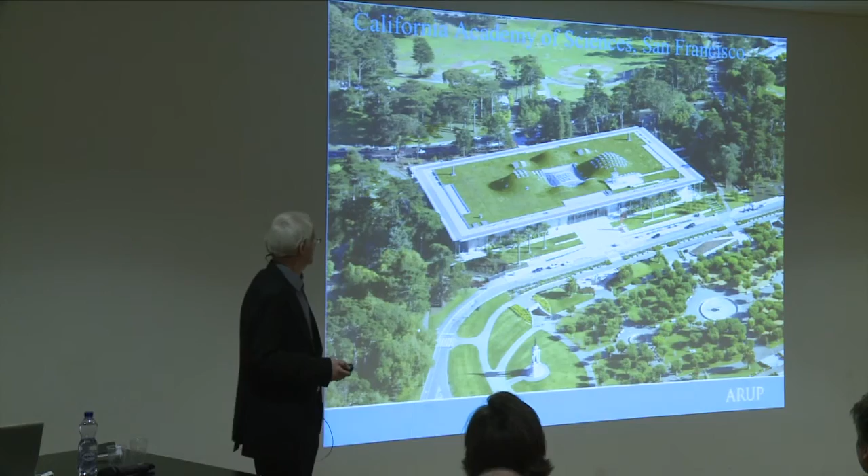So let's come on and talk about this project. It's the California Academy of Sciences.

Another thing that as ARUP we do is invest in research and development, because unless we put investment into innovation, and we innovate continuously through research projects but also through our own projects, you do it on the job and off the job together. Then we will not be able to bring new solutions, new ideas, new directions to our projects. Very appropriate today with COP21 started, the climate change is a huge challenge which demands that sort of level of innovation and integration if we are to solve it.

So ARUP is the creative force, as we heard, behind many of the world's most prominent projects. I hate to use the word iconic, but we do. And I want to talk to you about one or two of those this evening. But first of all, I just want to put this quote up, which is a kind of preface to everything that I want to say.

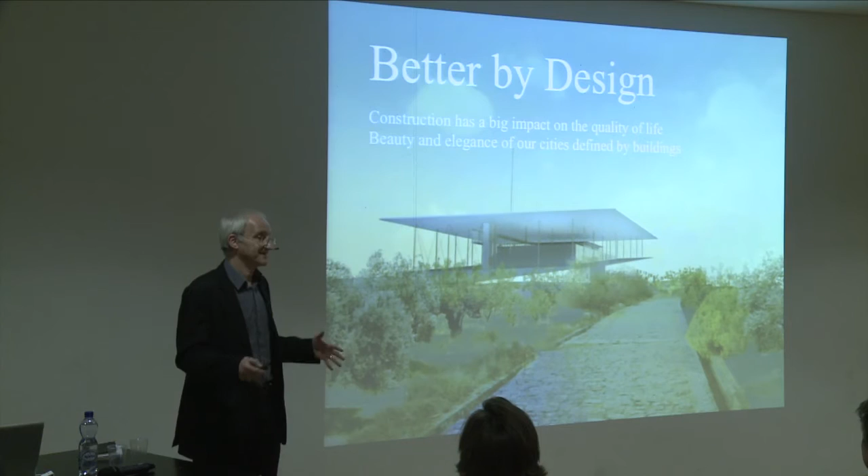And people say to me, well, I just like green fields, I don't want to touch anything. So let's imagine that a sustainable future involves construction. It's good for us in different ways, it's good for us because it can have a big impact on the quality of our life. The beauty, the elegance of our cities that we walk through are largely framed and function by the buildings which sit within them and the spaces that they create between them.

And our buildings, our construction is able to improve the society in which we live through hospitals, health, education, by creating better social fabrics, by creating cities which are nice to dwell in. So construction can and does enhance society.

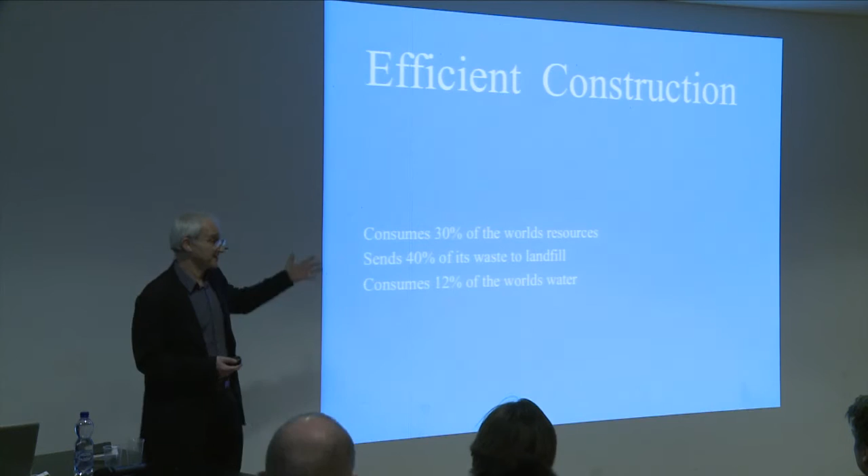But of course it needs to be efficient because it consumes around 30% of the world's resources. It sends, I think this is an old figure, 40% of its waste to landfill and consumes 12% of the world's water. So what we build, as we build it, has a huge impact on the world in which we live, okay?

Of course, our cities and the energy that they consume has a huge effect on greenhouse gas. And that's why at COP21 they are finally having some sessions on the effects of buildings, which is really important.

So this is where I think we want to go. What I think is that we need to think about what is our responsibility, what is responsible design. We can put in intuition and research, and I'm going to talk a bit about that. And hopefully the outcomes that we're looking to get are efficiency and elegance within our built environment. And that's a kind of pattern which I hope I can illustrate a bit of.

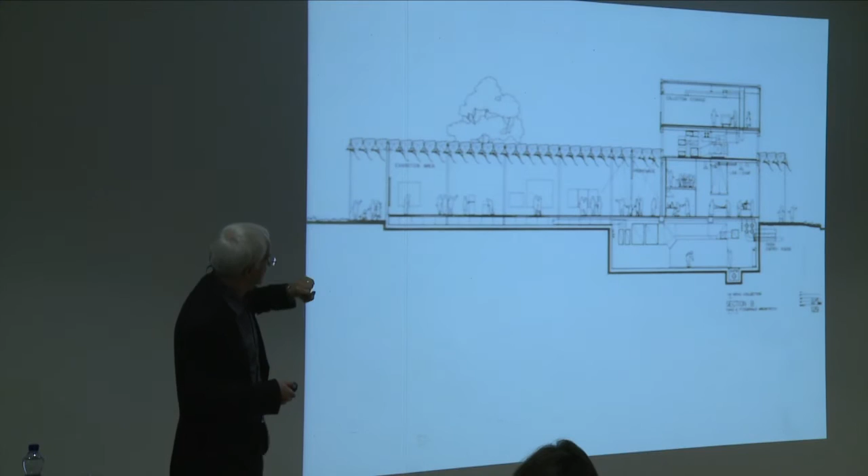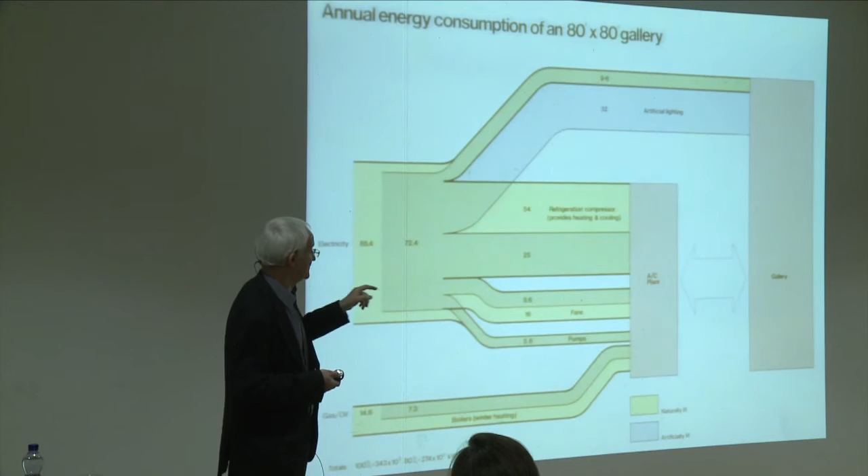One of the other objectives, even at this time, was energy performance. Right at the beginning of this project we asked, what's the difference between a black box with artificial light for the galleries and a top-lit gallery with daylight? There are pros and cons of both, energy-wise, and actually in those days it was slightly more efficient to have a black box with artificial light.

But that was the pure energy argument. The argument for a day-lit space that was beautifully lit, where you could appreciate the art, was of course overpowering, and it was only about 15% difference in energy. So it's a quite different equation, and I'll illustrate that with some other things.

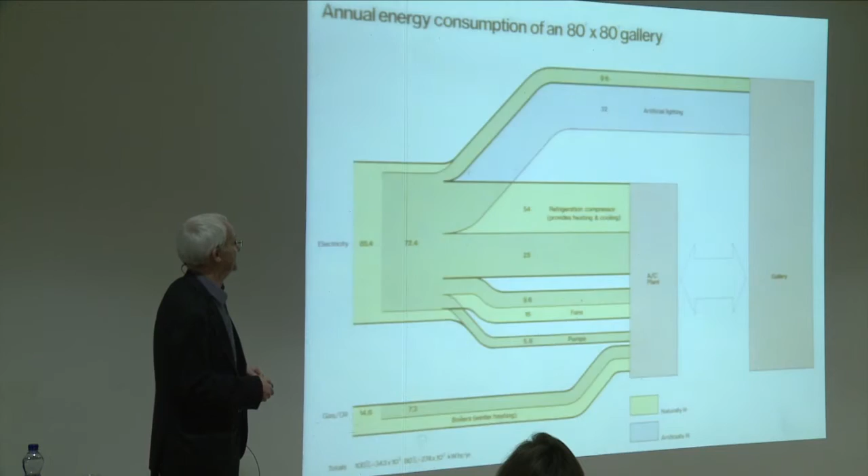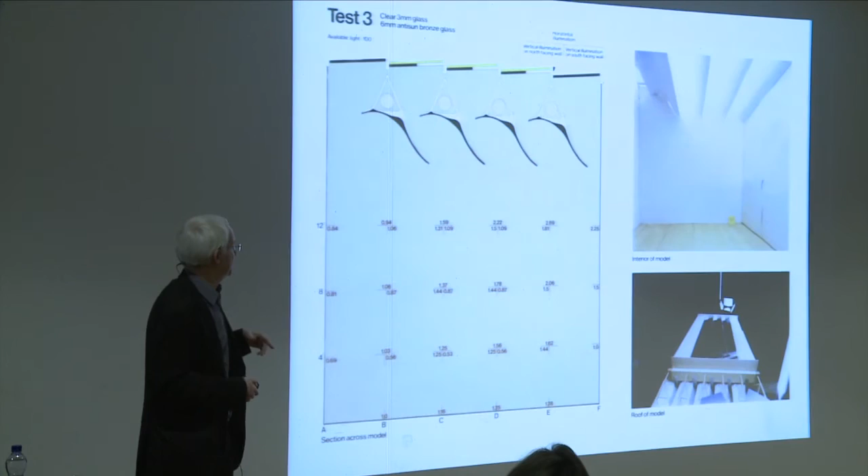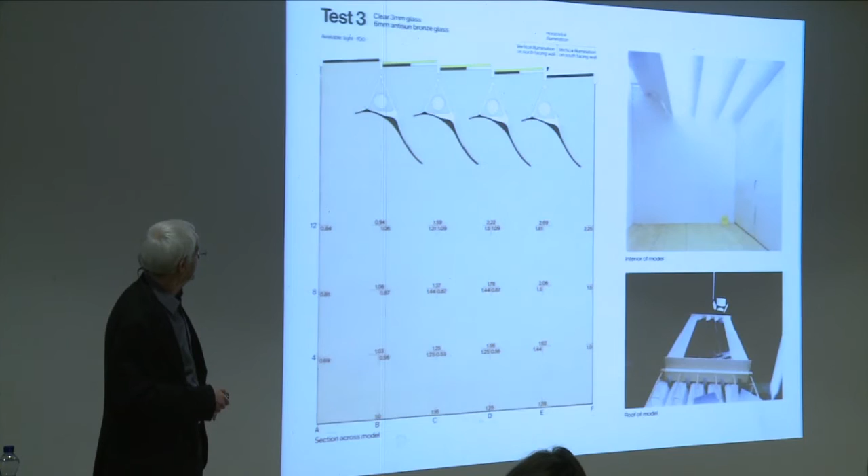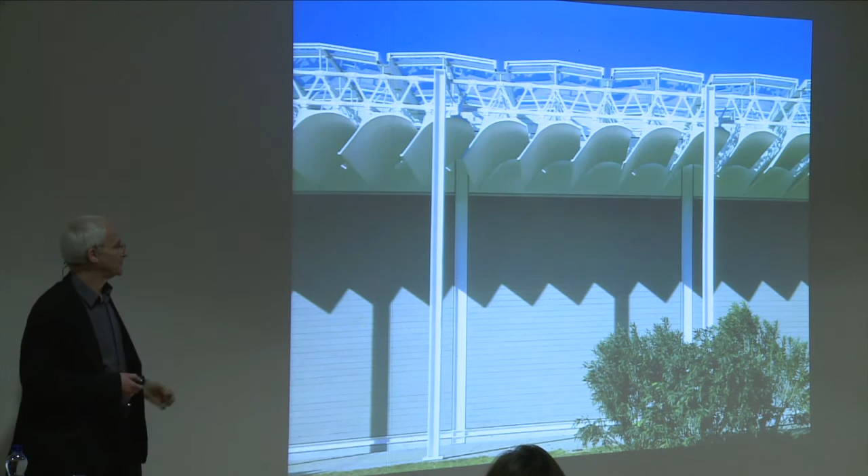This is another, more up to date one, in the City of London. It's a building that was built probably 20 years ago now, I think. It's called the Helicon, and the issue here was how to do something. We were just coming out of the recession, and the client, a developer, said we want to do something which positions our new building in the marketplace such that we can be a differentiator when the market comes back on stream.

So he was really keen to make this project a low energy project. So we had a look at all sorts of issues, but the basic idea was to make the building as transparent as possible, so that we could make the most of the daylight within the space, and yet conserve the heat and keep out the sun from the building. So that was the goal.

This is the picture of the skin, and this is one of the early double skins. Single skin on the outside, double skin on the inside, and we came up with this idea of active blinds. The point of that was that the big surfaces in this building face east and west, so most of the glass was either on the east or the west. So at least half of the day, there was no sun on one side of the building.

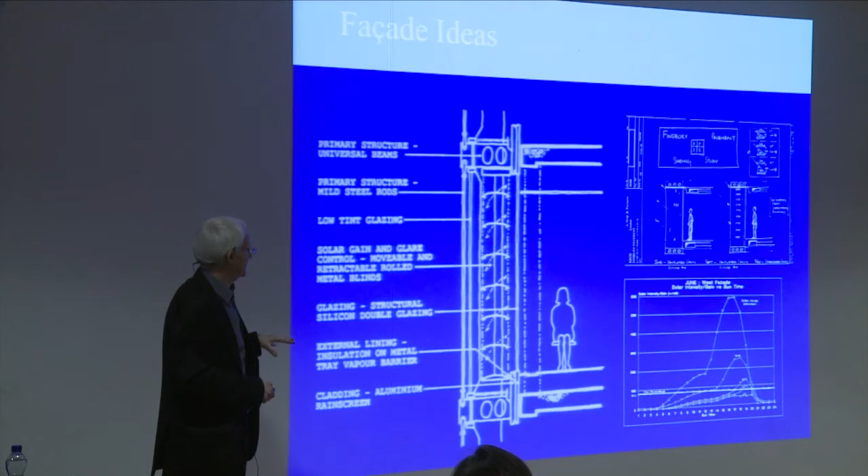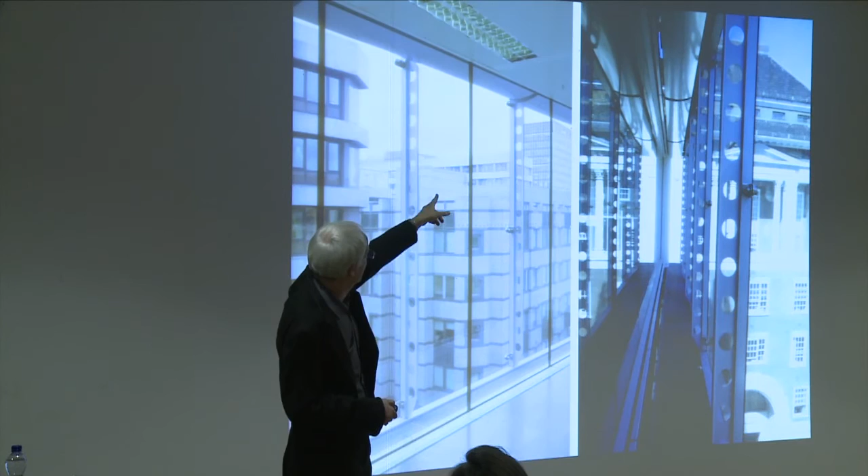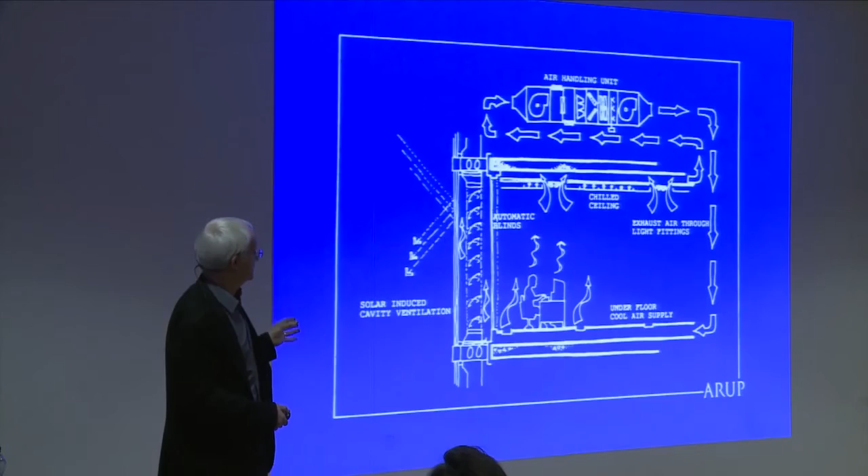So this was one of the early active double facades, and what that did, of course, was to reduce the solar gain right down, such that we could use a different type of air conditioning system. This is the retracted blinds, which you can see at the top there, and the full glazing. So as well as this system, we also did the first system in the UK, I think probably used earlier here in Switzerland, of underfloor air supply and chilled ceilings, both of which were innovative, but which we could only use because we had reduced the cooling load enormously on the building.

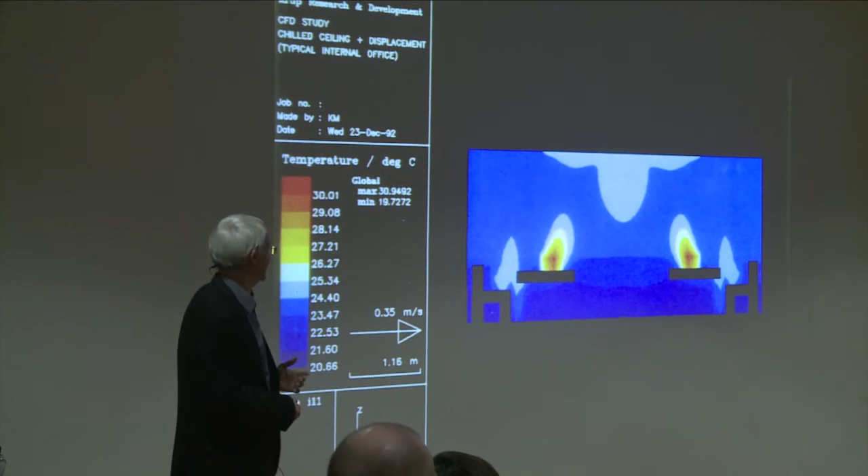So this is just a very early CFD. It looks terrible now, doesn't it? It's funny how these things change so quickly in 20 years, this sort of looks really old-fashioned. And here's the chilled ceiling. They didn't actually exist as a panel in those days, so we made our own. We knew what we wanted it to do, so we just bought some standard metal ceiling panels, put a coil behind them, and it became a chilled ceiling.

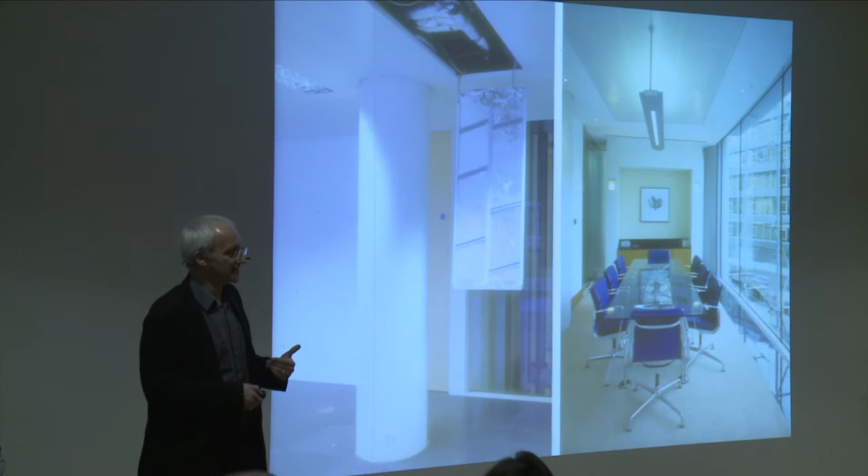So this was an idea of trying to do something and then thinking very much in a different way. It was the first speculative building in London to have this sort of facade, and the first speculative building in London to have a chilled ceiling as well. So ideas, doing a bit of research, trying to make the thing work, and then building it.

So this is probably the biggest project I've ever worked on. It's the longest project, it's Kansai Airport, and I'm not going to talk about much, just one thing on this airport. There's the terminal building, it's from here down to there, 1.8 kilometers long, and it has across here, from here to here - this is the departures hall. From there to there is 80 meters.

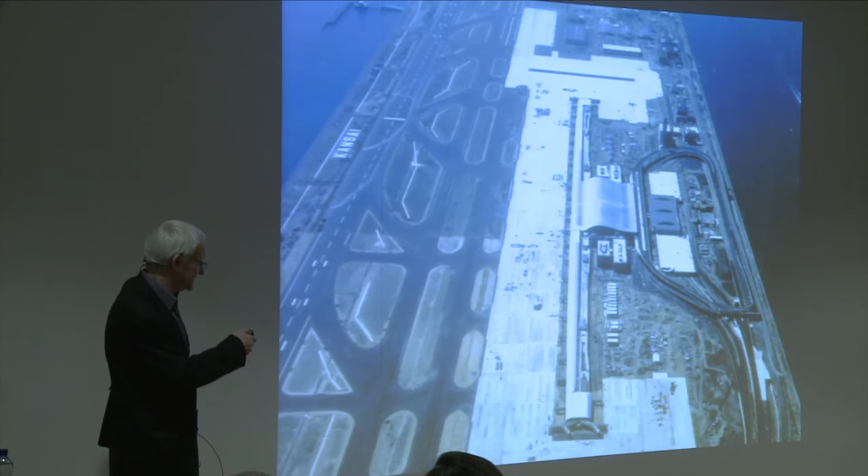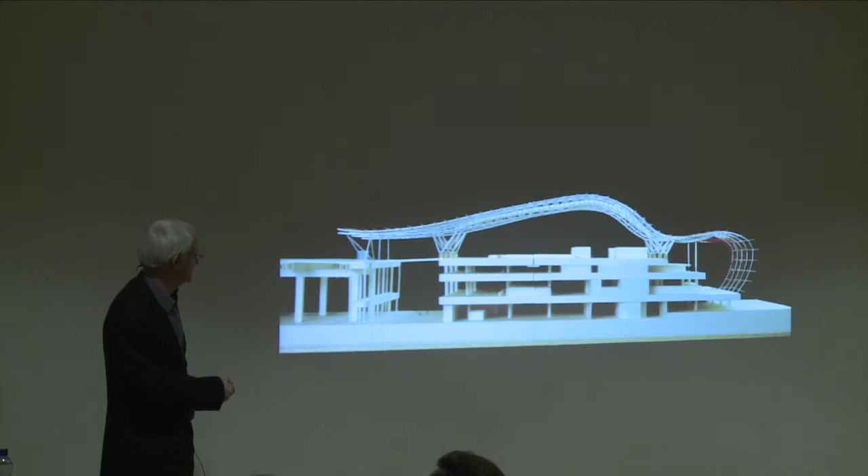The concept and the idea at competition stage for this project was to have a shape like an aircraft wing, but which also enabled us to air condition the whole of this space, 80 meters, through a series of jets that were placed in this position, like this. So again, some old drawings - the jets are here, and they blow air across this space and create a circulation. So we have what we called the macro system and the micro system.

This was the idea behind this project: to supply all the fresh air, filtered fresh air from these jets. We only had 17 of these jets across the whole length of the space, but at the same time wanted to create an atmosphere which I called a gentle breeze. The idea was that when you go into an airport, you go with your coat on, you're not going to take it off. It's almost like an outside space, but protected from noise, from pollution, from all sorts of things. So the idea was to use these jets to create an air movement.

There was a gentle breeze, made people feel comfortable, and created an environment that was slightly different to other things.

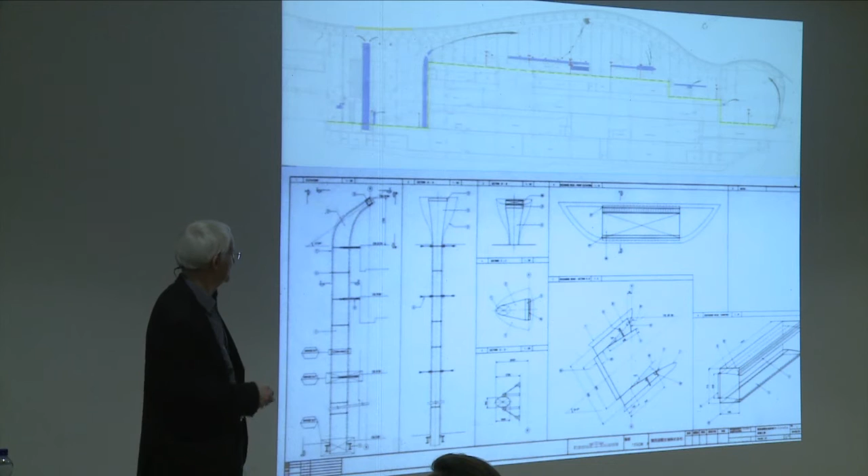In order to do that, we had to imagine, we had to actually design this jet. You couldn't buy a jet that did this, so we designed it from first principles, built it, and tested it. We also used computational fluid dynamics to work out the velocity of that jet, the mass of air we had to put in, all sorts of parameters for that air.

It seems strange, but at that particular time, this was a huge model, a massive model, because of the size and the type of jets. At ARUP, we did not have a computer big enough to run this model, so we had to go to a research university and buy some time from them so we could run it. Of course, you can all do this on your desktops now, but that was the way it was then.

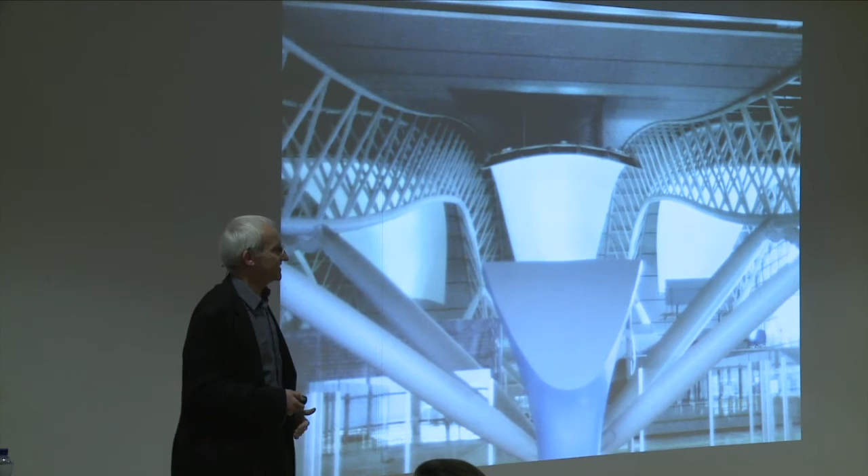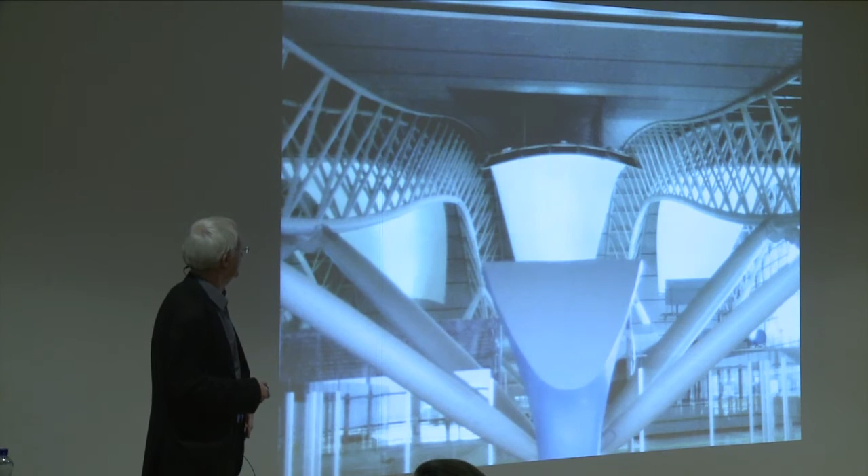And here's the jet. In order to make the air travel at 80 meters, we made this fabric, what we called an open air duct, so the air stuck to this thing. It's a bit difficult to see from this picture, but that enabled it to travel a full 80 meters across without dropping. There you can maybe see a little bit more closely.

So, it's a project in the UK called the Eden Project. It's in Cornwall, in southwest England. The client's ambition for this project was to build the biggest greenhouse in the world, and he wanted it as a tropical greenhouse. Our challenge was how we could do that with as little energy as possible.

That was the kind of framework which we went into this project with. There was a lot of discussion about the site in the early days, but in the end the client bought an old quarry. This quarry was for china clay. They extract china clay, it's very soft, the ground. They extract it using a high-pressure water jet, sucking it out. It's the material used to make all the pills that you take, the white things. So that's what they extracted from this thing. But at the back, they extracted the soft rock, and there was quite hard granite.

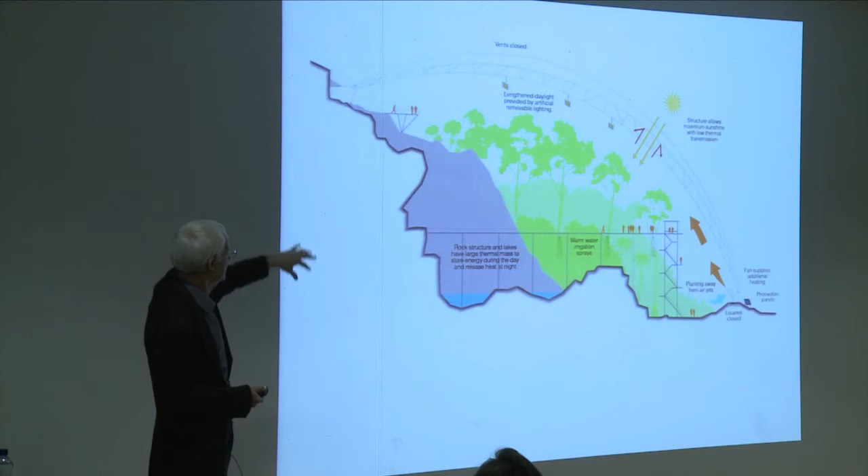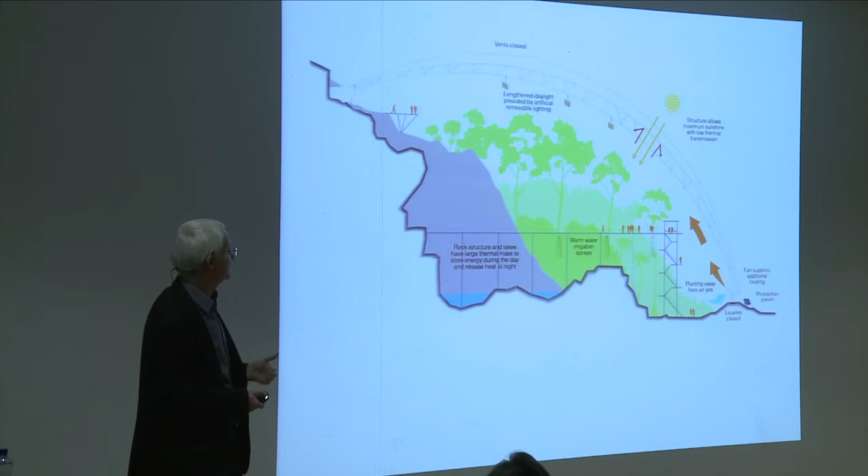So the idea was to enclose this edge of the cliff with this very large structure, and to build the tropical rainforest within this space. The challenge was, how could we enclose it efficiently and yet allow as much sun as possible? It faced south. We wanted to get as much sun as possible, absorb it in the rock structure, and prevent it losing all that heat at night.

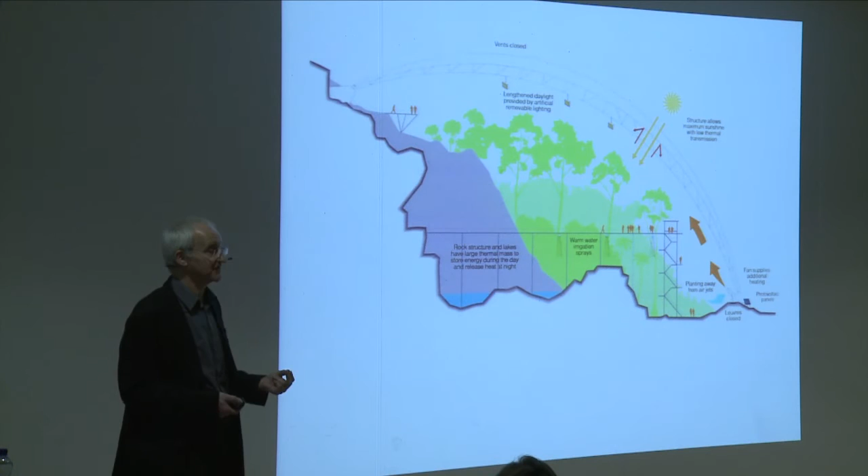So the property we needed for that enclosure was highly transparent, very lightweight, and highly insulated. That was what we were looking for. Basically, greenhouse glass doesn't have any of those properties, so we had to look for something else. So we came up with, and I'm sure you've all seen this now because it's used quite a lot, but it wasn't used very much then, this is ETFE foil.

It's a thin plastic membrane, and we used either 2 or 3 layers of this. It sat in a frame and was inflated using compressed air, so it became a bubble. This material itself is highly transparent - the individual layers are about 95% transparent, and as good as double glazing overall. It's very lightweight, and the maximum pieces on the Eden project are 9 meters across, so very large pieces, very lightweight. Lightweight was good for the structure, but also really good for the lighting, because the last thing we wanted to do was block out the light. So the idea was we could let as much light in as possible.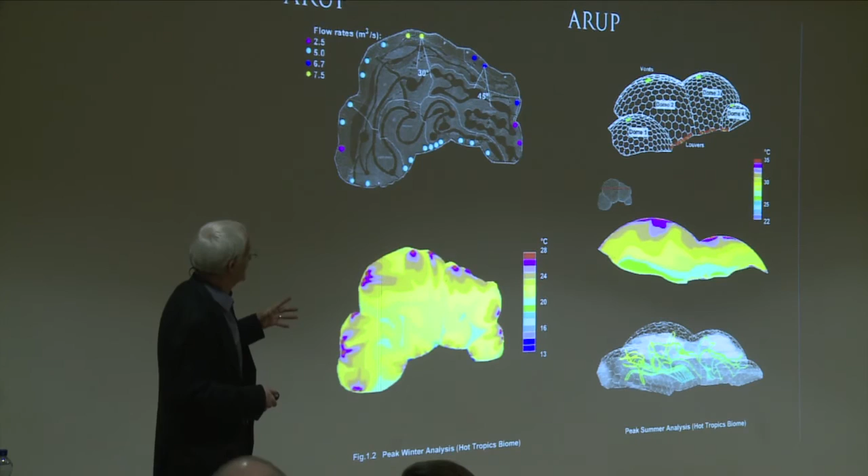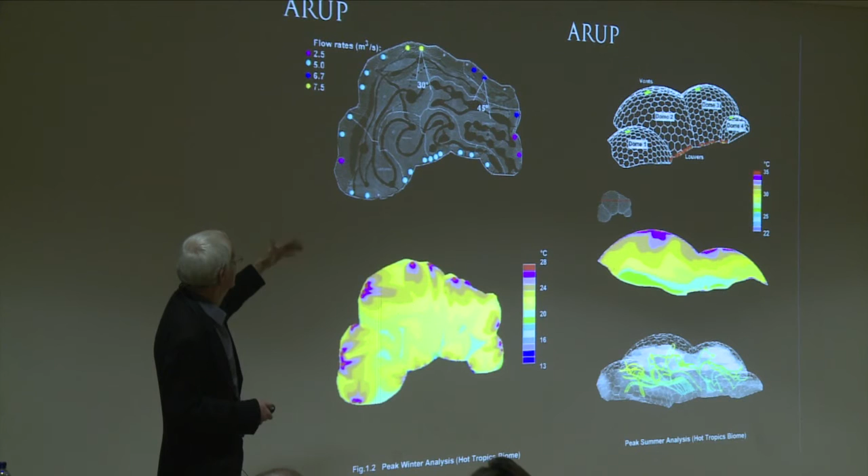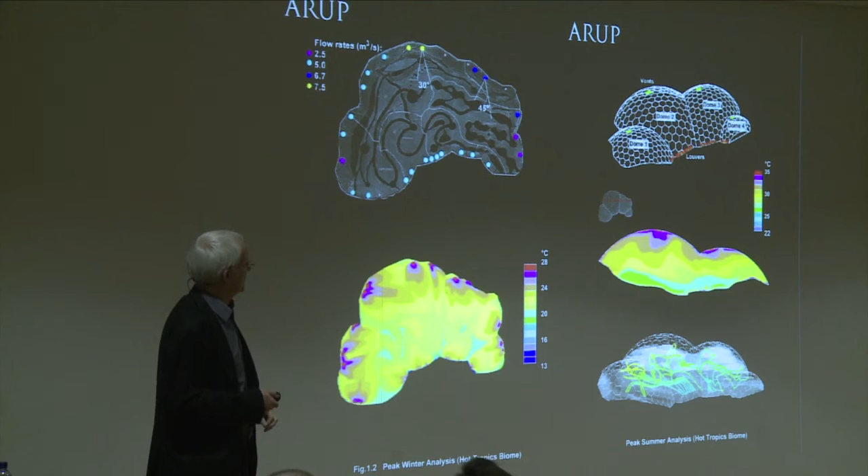So that was the material that was used. In order to take that idea and test whether we could do it, the other concept we had was we didn't want there to be any systems, any heating or ventilation within the whole space, because they wanted to be free to plant as they wanted. So we used the same principles that we did on the previous project on Kansai Airport, and used high-powered jets to provide all of the heating and air movement to the space.

And these are much less elegant jets in that case. But here's the material, and of course, keeping it warm is one thing, but stopping it getting hot in the summer is another thing. And so we're able to open the top and let the air out.

And this was a very early picture of the space. And you can see this huge space, but very light, very transparent, able to collect as much heat as possible and store it in the rock at the back here.

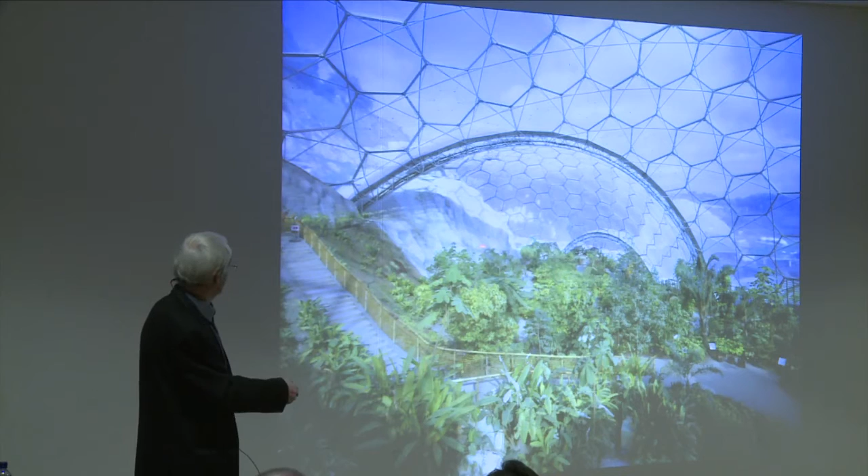And just to say that the other issue, of course, with a tropical thing is humidity. We had to create a humid space, and this is a picture of it, and we've done that by individual sprays, tiny high-pressure sprays that are in the space. The problem we had was that all the groundwater, let's remember it's a china clay pit, all the groundwater we could extract was white and full of solids of china clay, so we couldn't use those in the spray.

So actually in the end we collected all the water off the roof of these biomes, pumped it to the top, used some existing tanks which we relined, and then it's fed down to these jets. I think you can just see one of those spray nozzles there, and that keeps it like this except early in the morning, unfortunately.

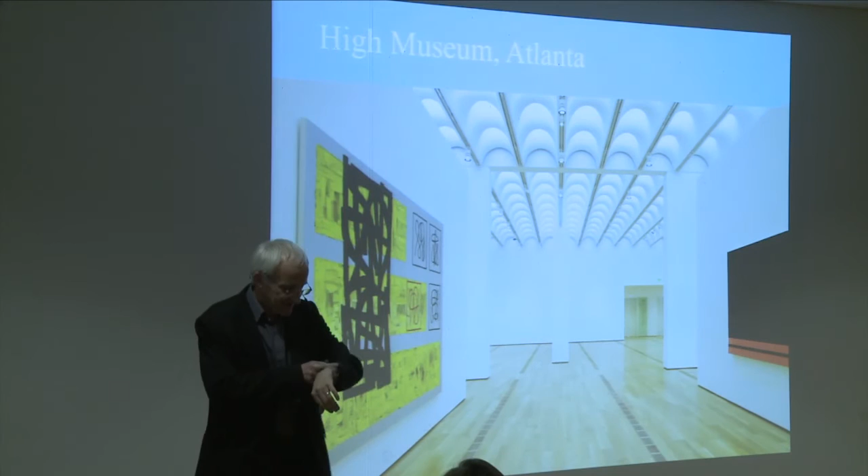Okay, good. Right, so I want to talk about another museum. Again, this one is with Renzo Piano again, and this is in Atlanta.

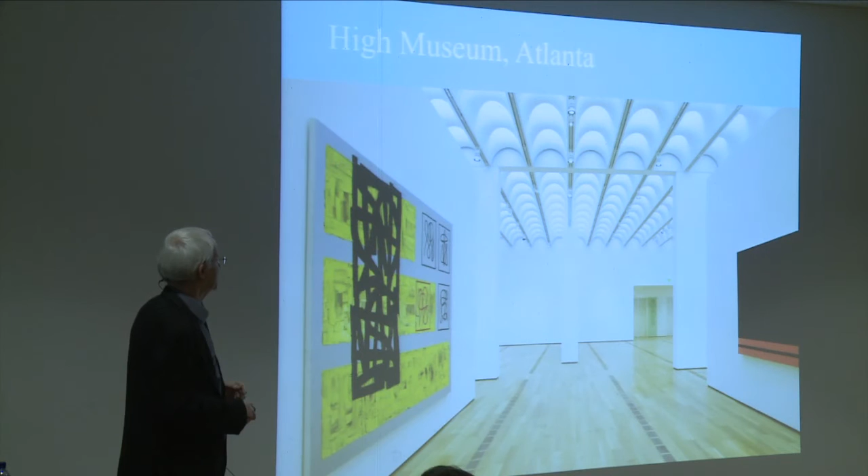This museum is quite different. The Menil museum that we did, we were able to block out the direct sun by these linear, what we call leaves, because the museum is on a block that faced north and south. This museum is on a block that doesn't face any particular direction. It was 37 point something degrees off. It was an odd facing block. So how do we get the same idea for the top light?

So we explored all sorts of issues, these sort of horizontal ideas. But in the end, it came up with a series of circles set in a grid, which we could block out the direct sun, but allow the right amount of daylight into the space. This is just an illustration of the sort of collaboration.

This is a wax model made from the piece, which we made in our offices. Renzo's office made this concrete piece, and we made a lot of other models on this thing to just experiment. There are some of these. Some of these are computer models. Some of them are made with wax, some polystyrene, some plaster. Anyway, the whole thing was about collaborations, integration, working together to produce some sort of ideas for the project.

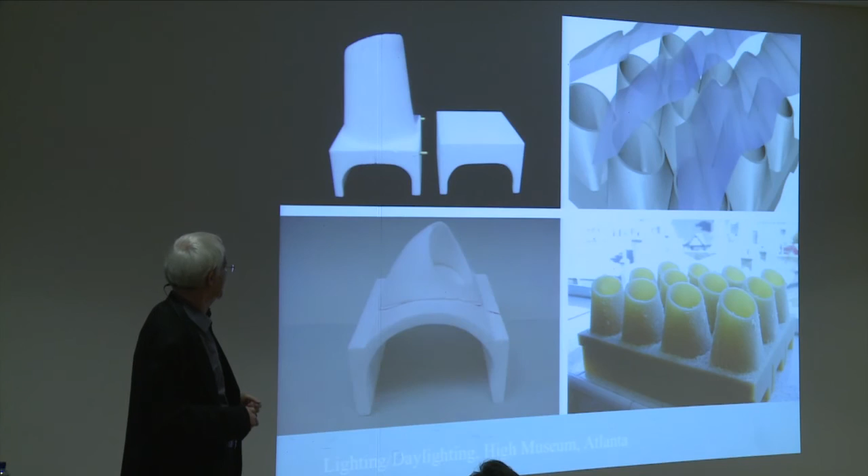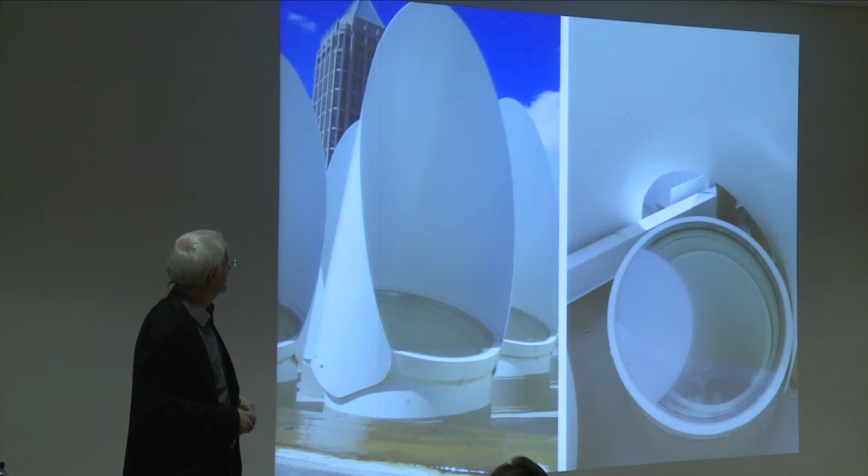Yeah, and these are these rather strange cowls on top of the roof, and a picture of the gallery inside.

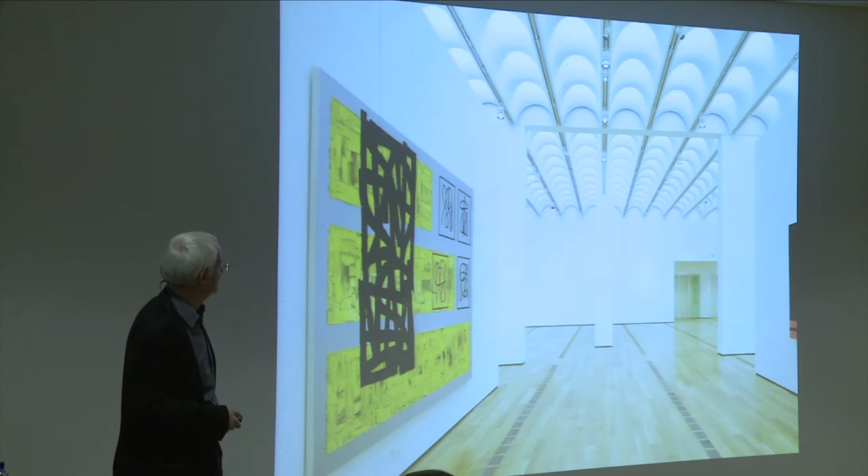This one is in Texas. It's called the Nasher Collection. It's just across the way from the Museum of Modern Art in Dallas, if any of you have been there. And this was a private collector who wanted to build a space, a garden and a pavilion, so that he could put his collection, give his collection to the city of Dallas. There's a guy called Ray Nasher.

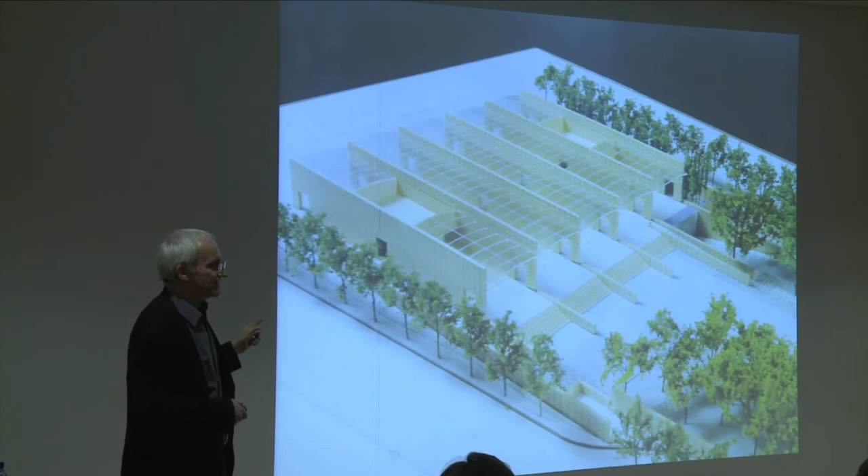Again, this is a piano museum, and the concept here was strong stone walls with a very lightweight roof for the pavilions. The challenge we came up with right at the beginning, the architect's idea, was that we wanted this roof element to be as light and thin as possible.

Yet it had to do all those functions we talked about for the other roof. It had to exclude all direct sun, because you can't have sunlight on objects of art underneath, so it had to exclude it all. It had to filter the light, provide waterproofing, and have a very thin structure. We also had to be able to hang the artificial lighting. Everything was done on that very thin roof. So the challenge was, how could we do that together?

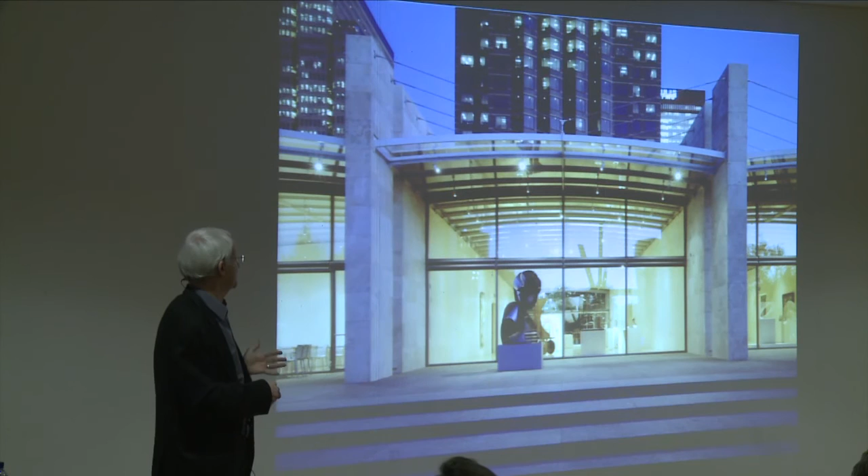So, of course, this one is cheap, this one is expensive. But he decided the shape was so crucial to what the museum looked like that he said, let's develop this idea. So we worked on wax models.

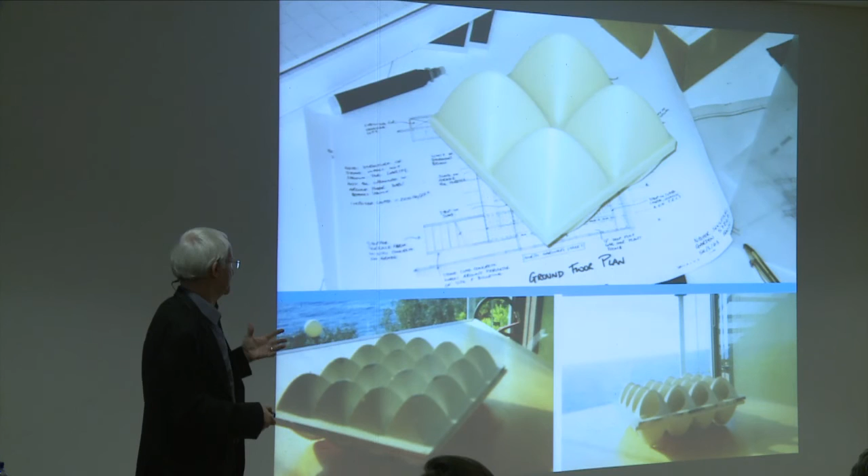Then we cast those wax models in aluminium. I think that might be an aluminium casting. We cast them directly from the wax, then went to a foundry where they cast them better and started developing this shape. We did all the geometry, they did all the casting, because our wax model used about four times as much aluminium as necessary, so they worked on reducing that.

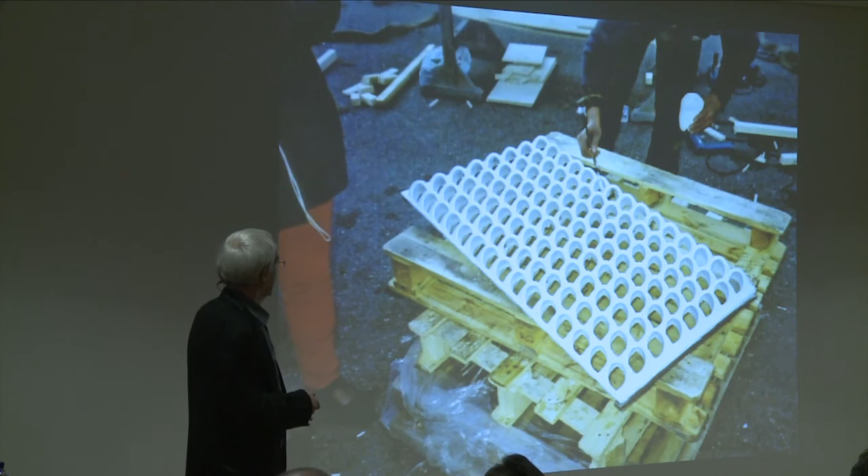We came up with this shape, which sits as a grid on top of the roof. The roof is curved steel members, hung from a suspended midpoint, so they're as thin as that, and the glass of the roof is underneath this structure, which you can see from here. This is the glass, these are the steel elements, which also carried all the lighting tracks.

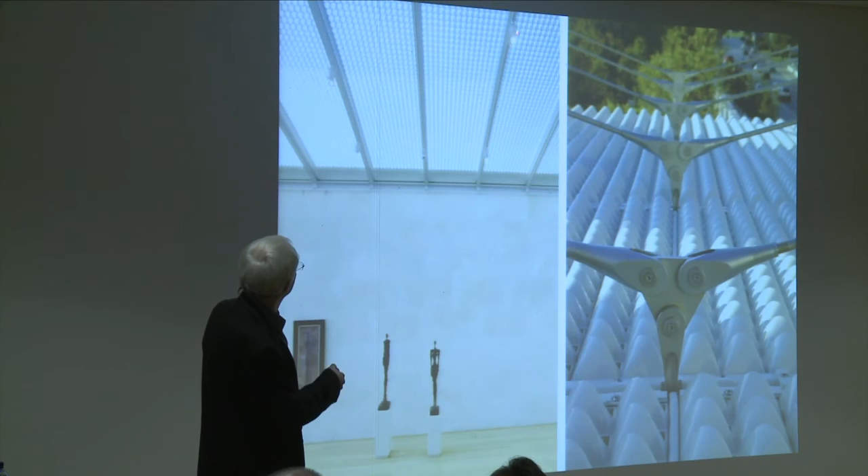But you can also see the effect of this grid. This picture is looking to the north. When you look north, it was kind of transparent, whereas looking south, it was opaque. That's exactly what we were trying to achieve. This lets the maximum amount of light in from the north, while excluding all the sunlight from the south, and not just the south, but tracking the sun all the way around.

There's another picture of the shape from underneath. This became very much the signature of the museum, derived from mathematical paths and principles, but made into a shape that gives the museum its character. And this is the picture from inside.

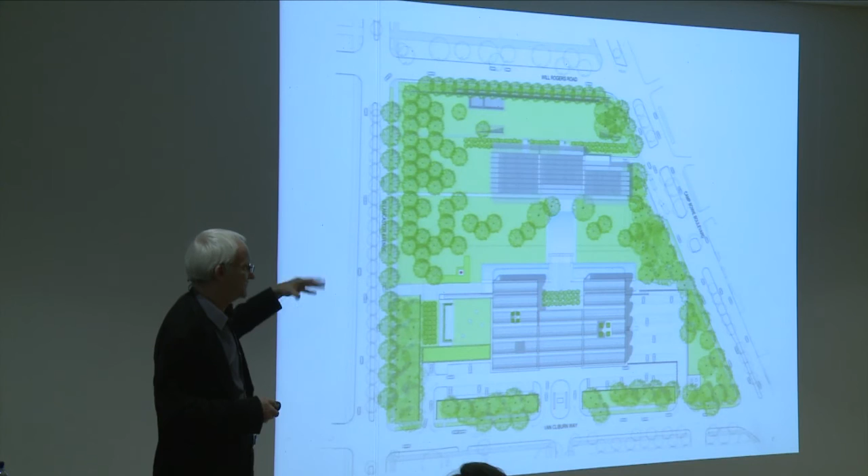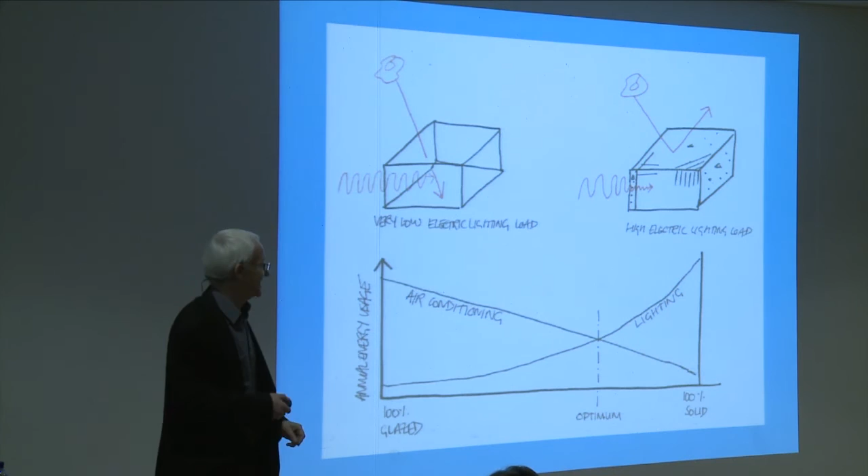Coming back to that early point I talked about on Menil, we did a study here: if you have a black box gallery, you use a lot of electric light but very little air conditioning, because you haven't got daylight. If you do it the other way around, 100% glass, you use a lot of air conditioning but not much lighting. We determined there was an optimum point, and so that became one of the things we tried to design within.

Like the other museums, we used the same linear principle because of the way it was orientated, north-south. But here, I said to the client at the very first meeting, and with Renzo, would you be interested in thinking about how to make this gallery carbon neutral? Can we make it so it generates as much as it uses over the course of a year? He said, well, yeah, sounds like a great idea. So hence the challenge, we kind of set ourselves up for a challenge really.

This is what we ended up with, a series of louvers which controlled the light and kept out the direct light, same principle as we used on the other museums. But these could turn. They have two positions, a summer and a winter position, for a better angle for the light and for the solar. They all have PV cells on them, as you can see.

We had to solve quite a lot of challenges for this. The main one being that in Fort Worth they have hail the size of tennis balls or cricket balls, whatever you want to call it, and they were very worried these would break the PV. So these PV panels turn over, they've got a motor on them. If it's going to hail, you just turn them and they flip over, and the backside is then pointing upwards. Sounds like an obvious solution, but it took us a little bit of time to come up with that idea, and also the mechanisms to really make that work effectively.

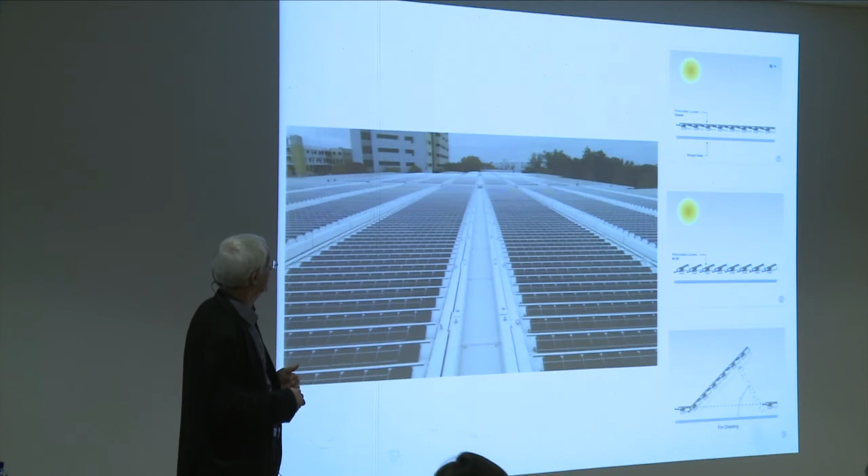Having generated the power we could from the gallery, having dealt with issues like the facade and the wall, we also designed systems that would use the minimum amount of energy - ground source cooling and heating, and various types of advanced heat exchangers.

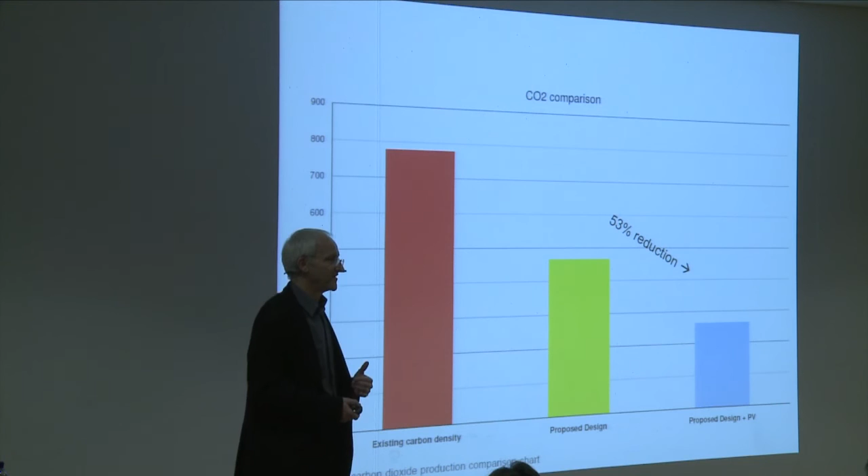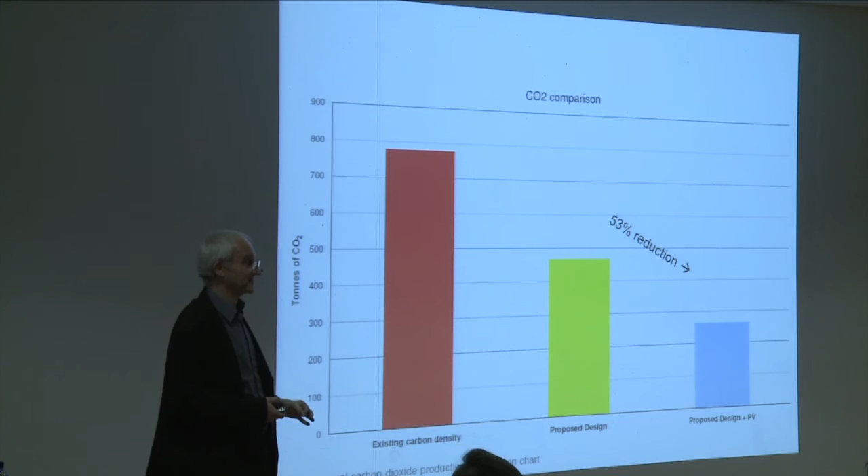So we didn't achieve exactly what we wanted. This is the existing Kimbell Museum, this is our museum with no photovoltaics, and this is where we got with photovoltaics. We didn't get to a completely carbon neutral gallery, partly because they kept adding lots of different functions like auditoriums and things, not just a gallery. It made it more difficult. But we got a long way by using that idea of the guiding star - let's start with aiming for something very high and then see how far we can get.

And this is a picture of the museum, and this is the entrance which faces the Kimbell on the other side.

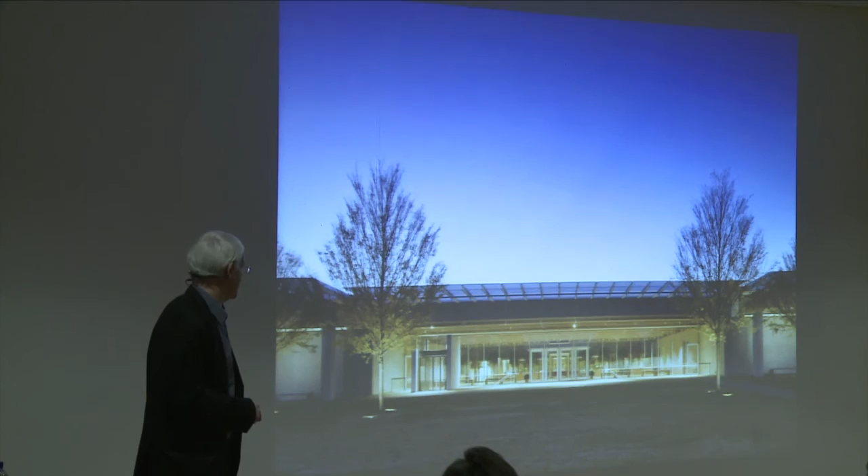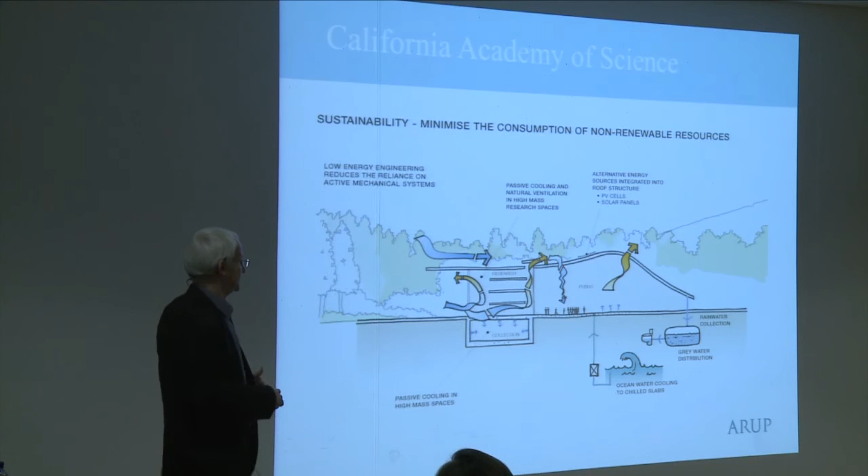California Academy of Sciences. I'll explain the project a little bit, but for me there's one fundamental thing about this project which is why I like it. This was almost the first sketch we drew of the project. It showed the ambition and the ideas of the project. I look back at this sketch, and when I went to see it after it had opened, I thought we almost completely managed to keep all those ideas and build them in. That, I think, is very unusual, actually pretty rare to do that. But it shows you if you start in the right direction, and have the right ambitions and the right imagination, you can begin to move towards achieving some of the things you imagined.

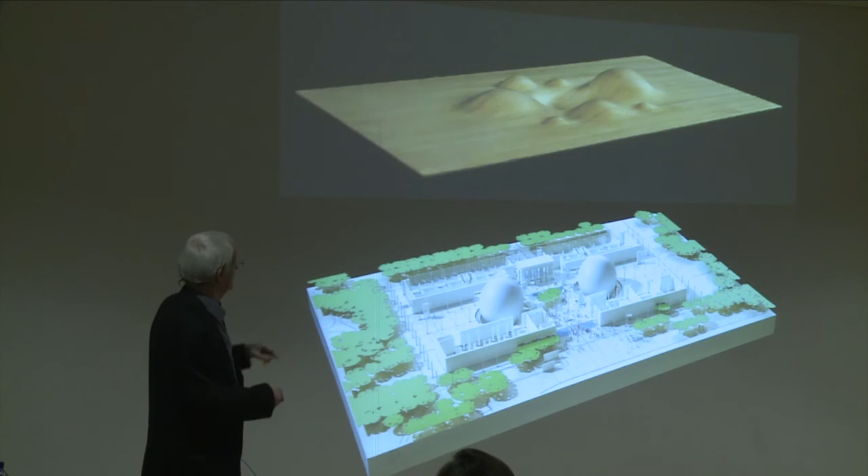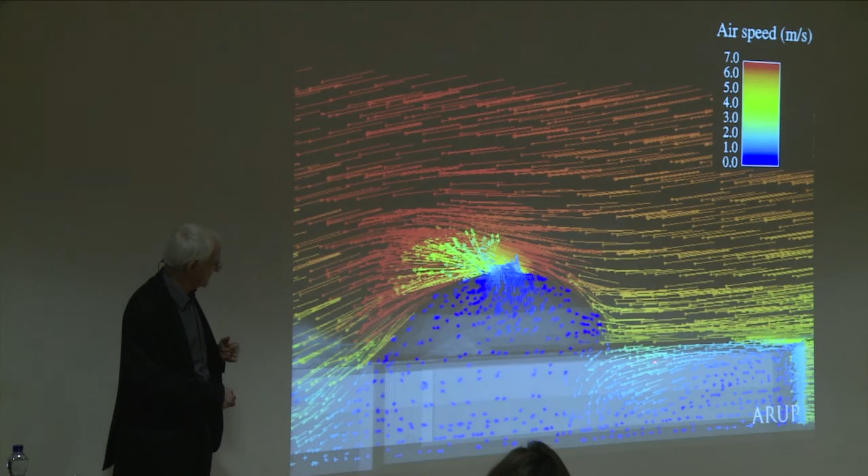One of the big concepts of this space was the very large open area of the exhibition hall, with these big spaces that sit in it. The idea was to have a roof which sat over all of that and had these mountains in it, these bumps, because of this concept - if you imagine the wind that blows off the Pacific Ocean, comes through Golden Gate Park, it comes to one of these domes on top of the thing, gets compressed, and then causes a negative pressure here, which pulls the air through the slots at the side and underside of the hall, through the hall and out through the top.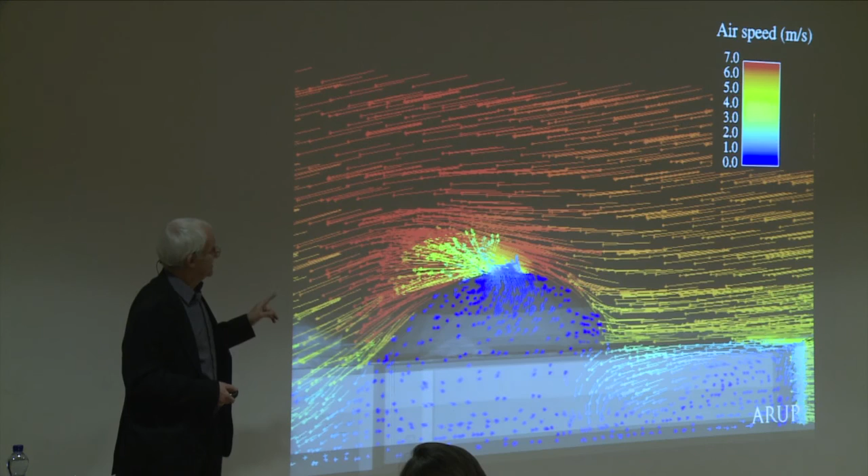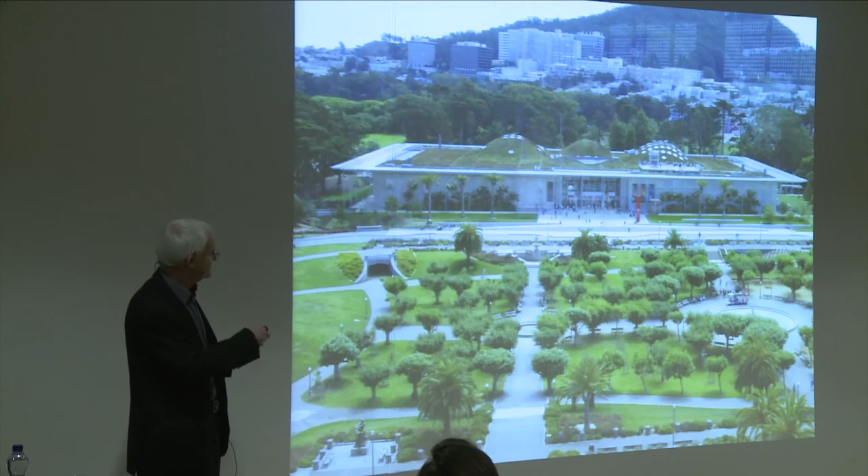This is a really old principle, nothing new at all. It was used in Iran, a very long time ago, with the way they used the desert airflow. So this was the principle - these are the domes, and these are the holes on top of them. You can see them like this, so they open up and allow this negative pressure to pull the air through, and they were also used as daylight devices.

Coupled with that airflow through is that all of the ceiling, walls and floor of that exhibition hall are made from concrete, so they act as a heat sink during the day, and then they're cooled down at night.

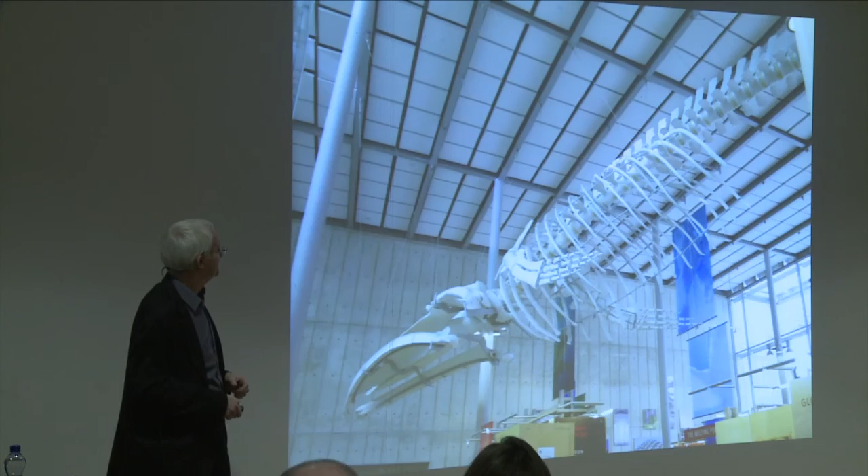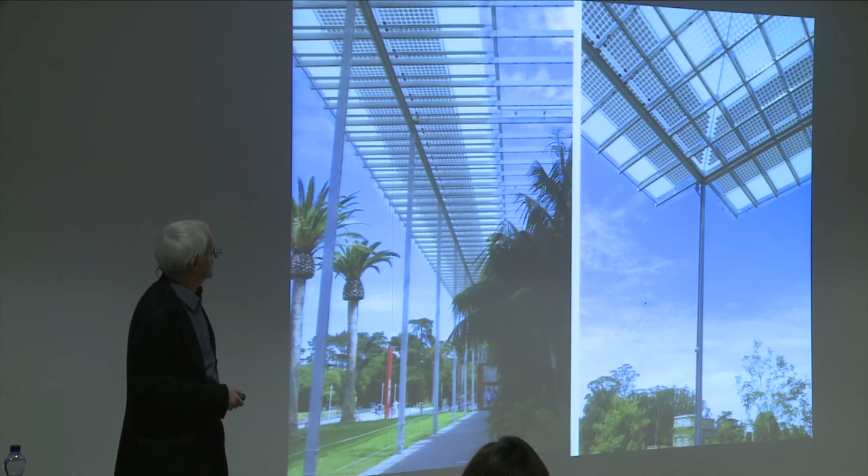At the same time we created a garden on that roof, and added photovoltaics to provide at least some of the power for the museum.

This is the latest project. It's only just opened, in Malta - a new city gate, and this is quite a different concept altogether. Malta is one big rock; the whole island is made of rock.

It's made out of this limestone, and the idea was that the building would be made out of this same rock, as are all the other buildings in Malta, but carved in such a way to achieve a very efficient facade that would keep out the sun.

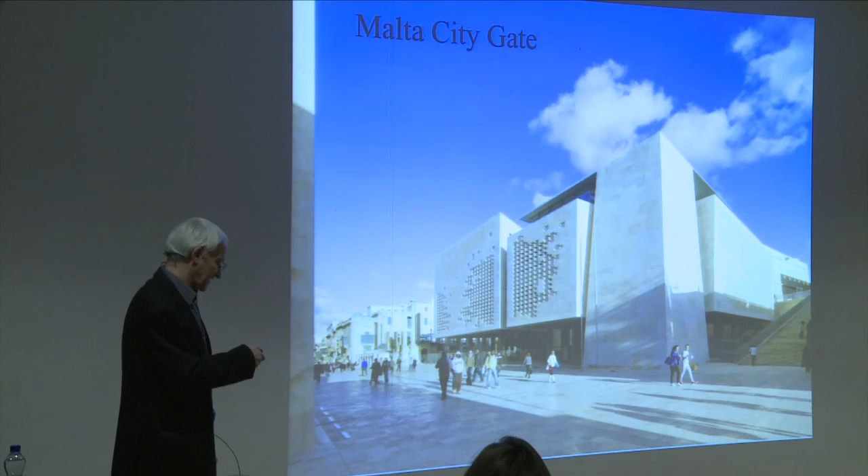So you can see this is a carved facade keeping out the sun by the angles of these fins. Here's another shot of the final building from the outside. From the inside you can still see out through the windows, but they're partially shaded by these stone fins.

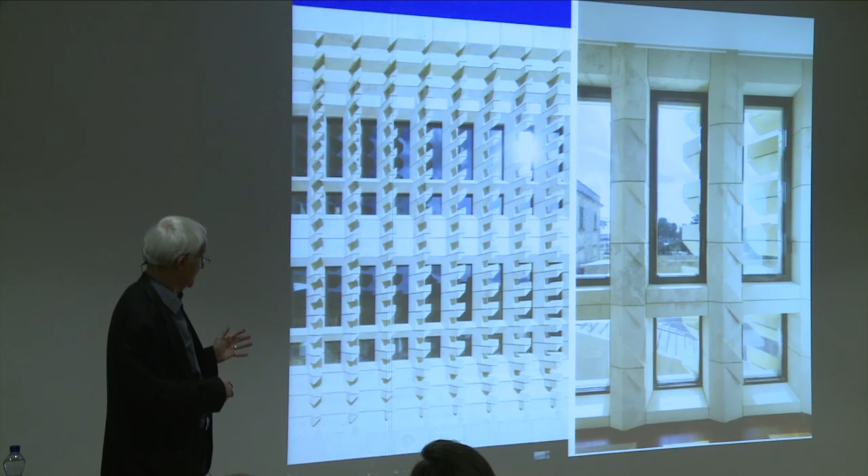The stone is inside and out, so it provides a heat sink in the building, both from heat coming in and going out. All the windows are operable because in Malta, being an island, there's quite a good breeze, particularly in the afternoon, so we want to maximise that. So: heavy stone, shaded facade, and natural ventilation.

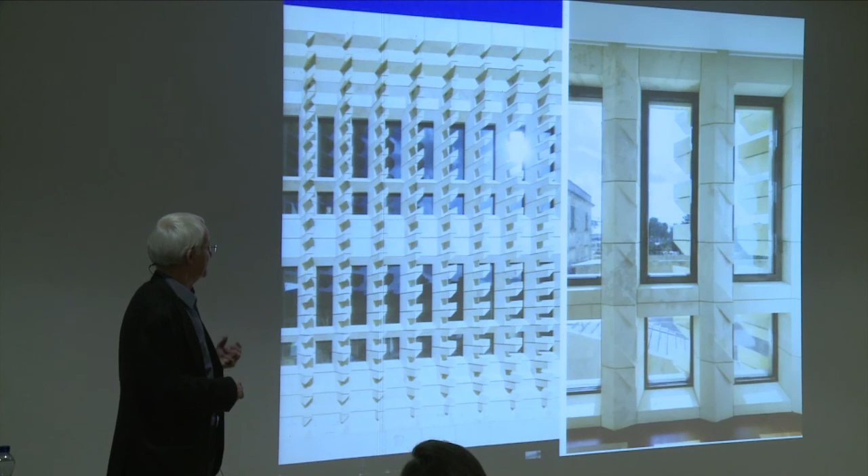That was the basis of the project. We decided we wanted not only to use the stone in the building, but also underneath it. So we put heat exchangers down 150 metres into the rock underneath, which provide storage for excess heat in summer, and we can pump that heat out during winter to heat the building.

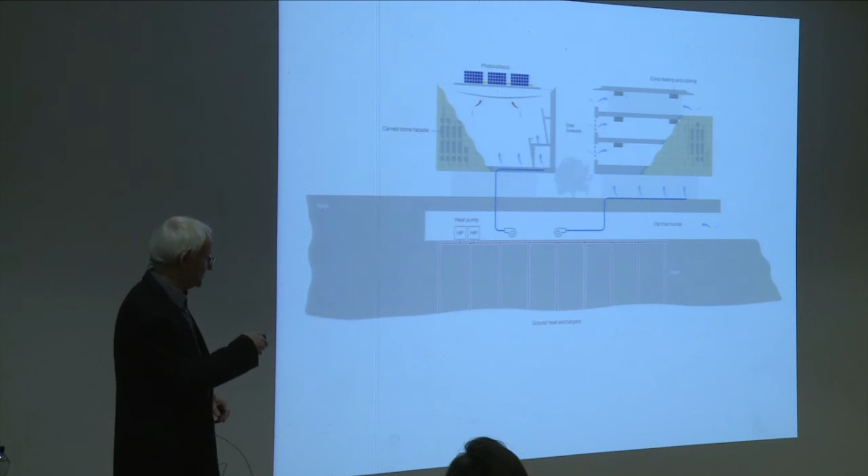This is the principle of that. It provides all of the heating and most of the cooling, with just a little bit of extra cooling we need to provide.

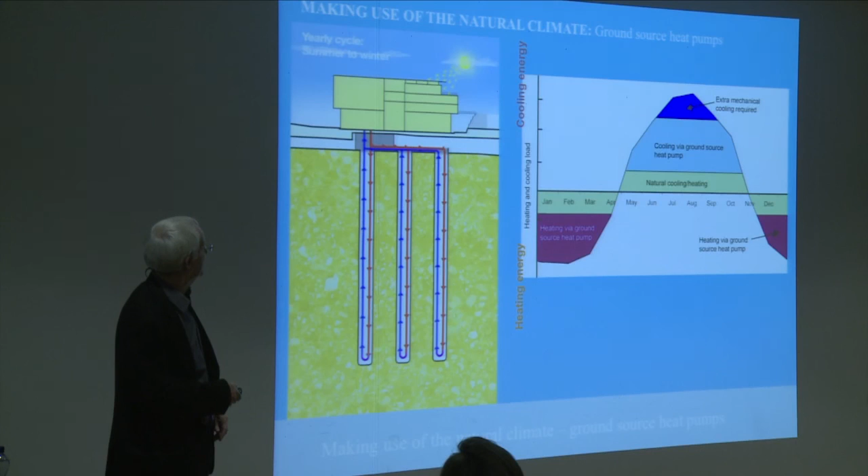As a result of really driving down the energy performance, this small photovoltaic array on the top of one of the buildings can provide about 60% of the energy needed, because we've reduced demand so much that this becomes a major contribution.

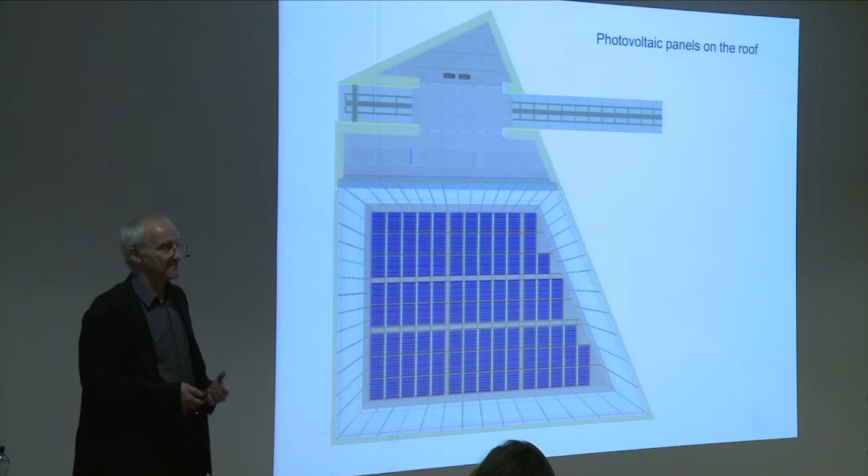In Malta, one of the other key areas is water - there is none on the island apart from what they collect. Traditionally they've collected rainwater underneath every house in cisterns, so we've done the same. In fact we found a cistern under the building when we excavated, so we used that to collect water for all sorts of irrigation needs.

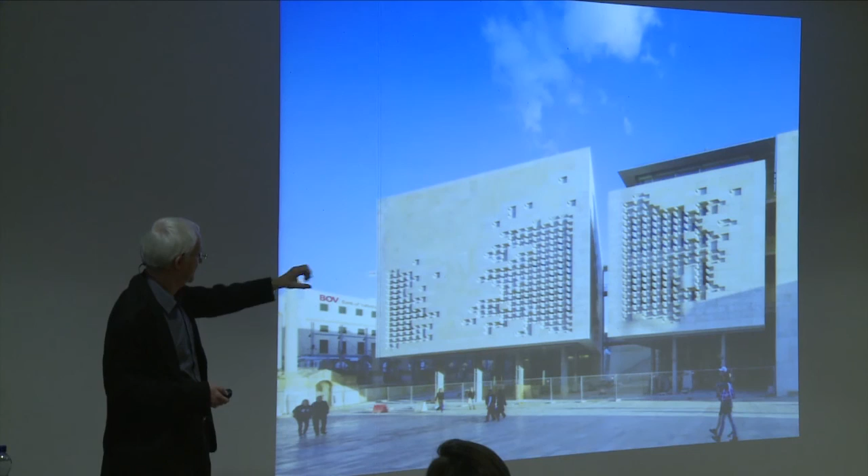This is a picture of the final project. You can see the carved facade that relates to the functions going on behind it, but also provides light and shading into the space.

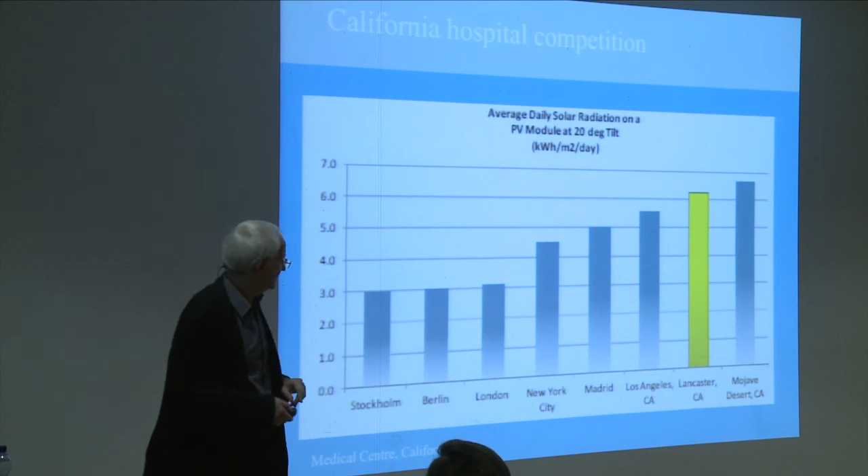I've just got three more slides. This was a challenge - a competition for a building in California, called Small Hospital, Big Idea. The fundamental thing I wanted to highlight was that the location given for this competition was Lancaster in California.

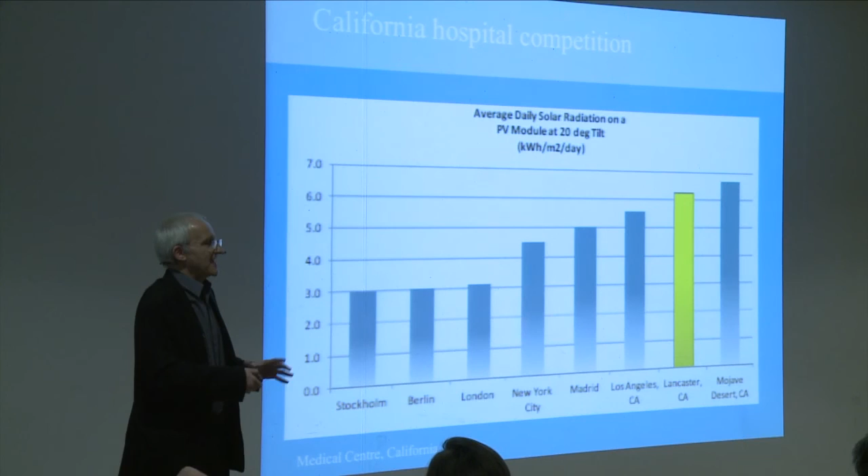This is the amount of solar radiation there, and the only place bigger than that is the Mojave Desert. So basically the natural resource we had on the site was sun, and the whole project was about how you deal with that sun.

I won't go into the detail, but we came up with a strategy, represented by this diagram, meaning all of the energy required to run that hospital for a year could be derived from this PV array - not necessarily all at once, but over the course of the year.

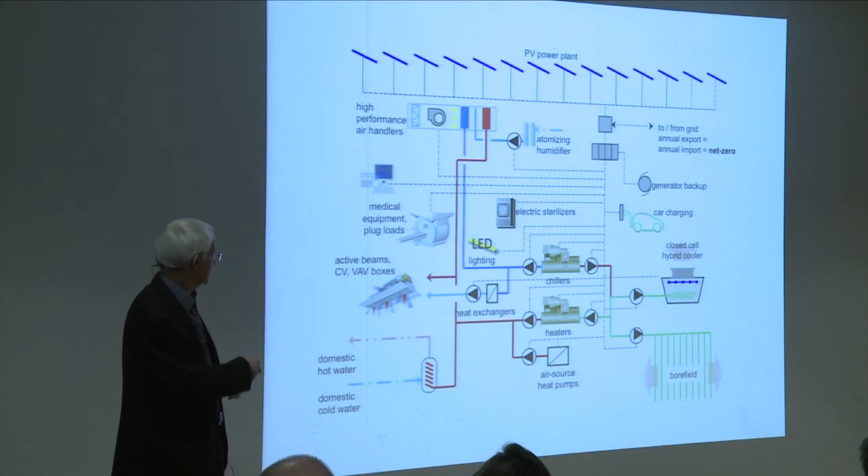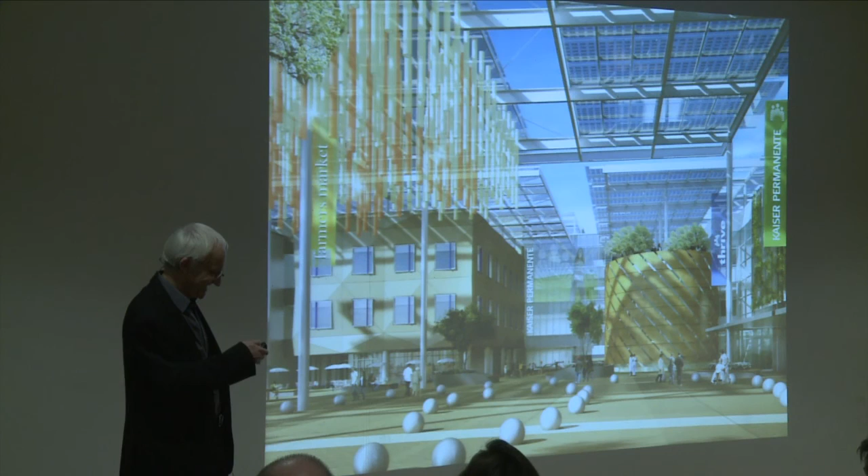And that was it really - just to say thank you, and hopefully that's given a little idea of one or two projects where we were able to show integration, collaboration, intuition, and research to back it up. Thank you.